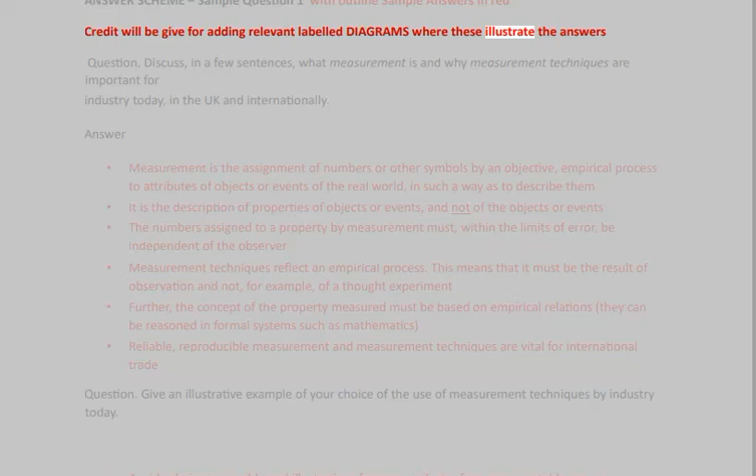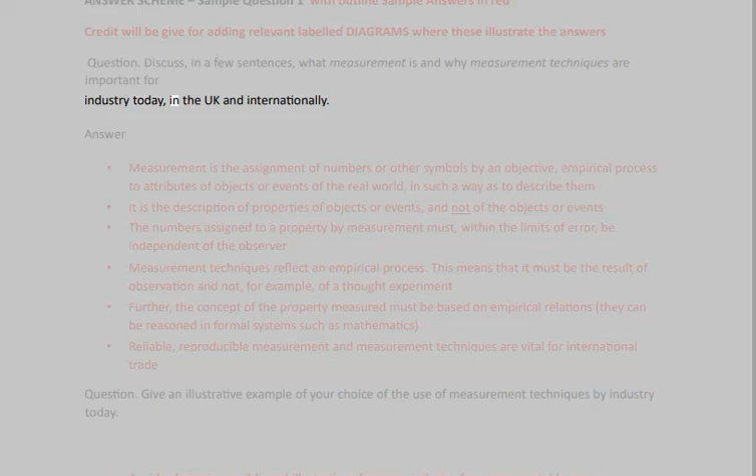Answer scheme, sample question 1 with outline sample answers in red. Credit will be given for adding relevant labeled diagrams where these illustrate the answers. Question: Discuss, in a few sentences, what measurement is and why measurement techniques are important for industry today, in the UK and internationally. Answer.

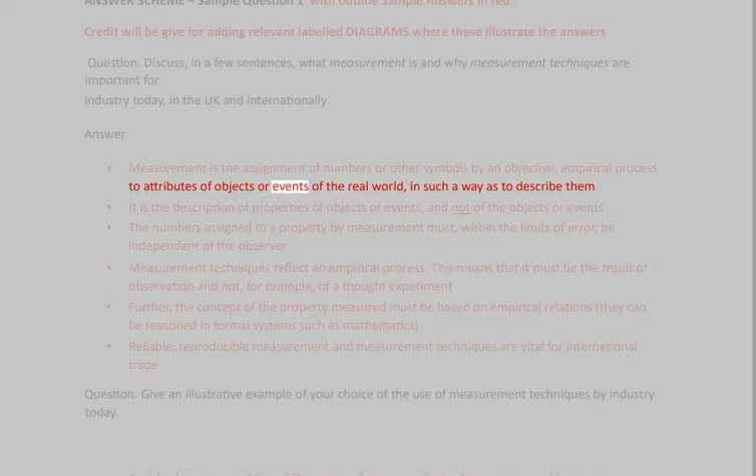Measurement is the assignment of numbers or other symbols by an objective, empirical process to attributes of objects or events of the real world, in such a way as to describe them. It is the description of properties of objects or events, and not of the objects or events. The numbers assigned to a property by measurement must, within the limits of error, be independent of the observer.

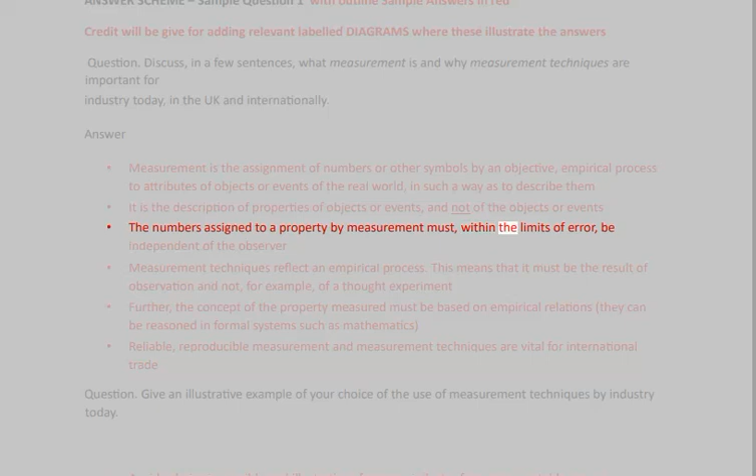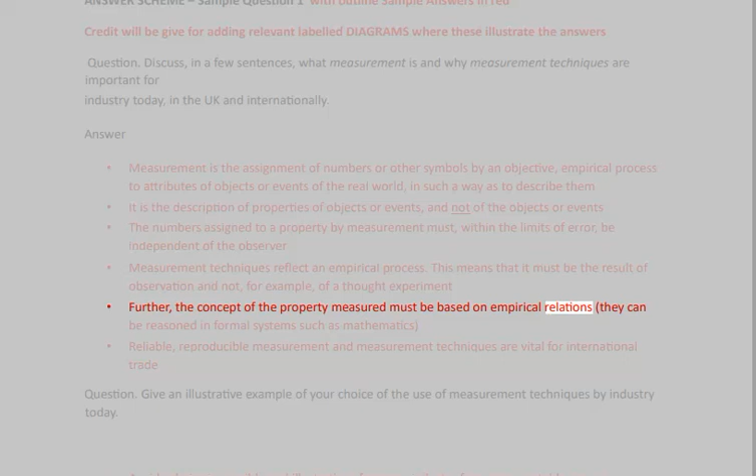Measurement techniques reflect an empirical process. This means that it must be the result of observation and not, for example, of a thought experiment. Further, the concept of the property measured must be based on empirical relations. They can be reasoned in formal systems such as mathematics. Reliable, reproducible measurement and measurement techniques are vital for international trade.

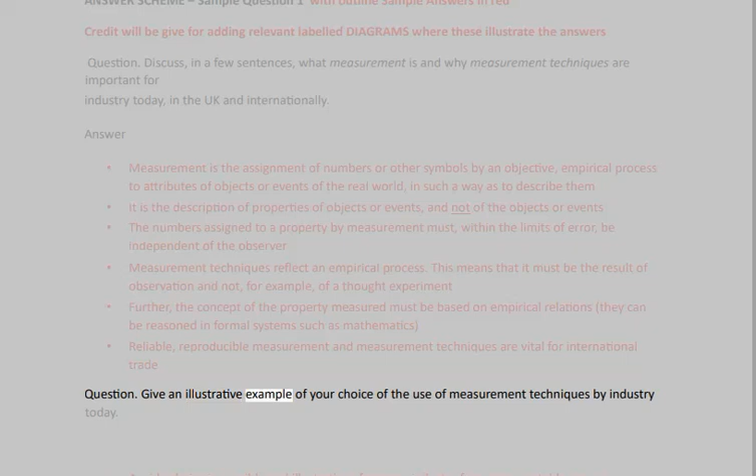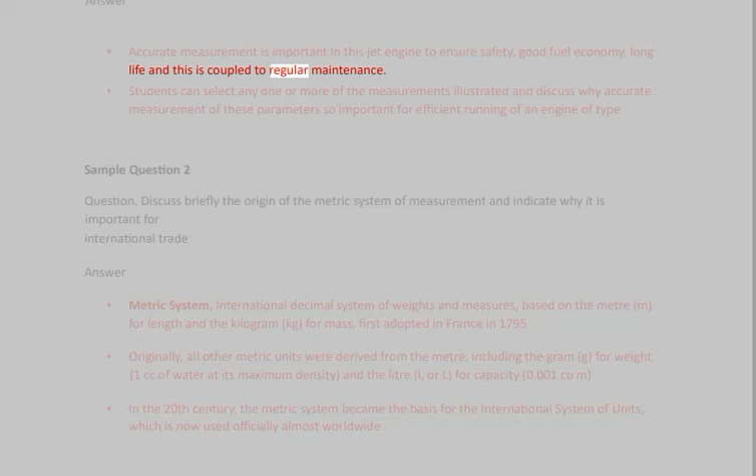Accurate measurement is important in this jet engine to ensure safety, good fuel economy, long life, and this is coupled to regular maintenance. Students can select any one or more of the measurements illustrated and discuss why accurate measurement of these parameters is so important for efficient running of an engine of this type. Sample question 2.

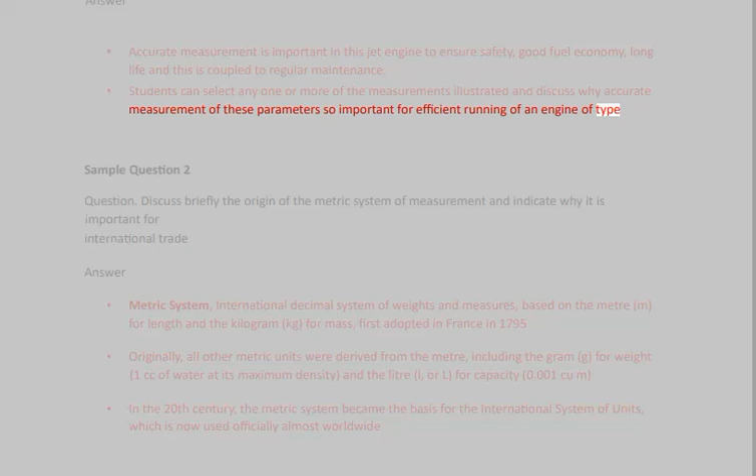Question: Discuss briefly the origin of the metric system of measurement and indicate why it is important for international trade. Answer. Metric system: international decimal system of weights and measures, based on the meter, m, for length and the kilogram, kg, for mass, first adopted in France in 1795.

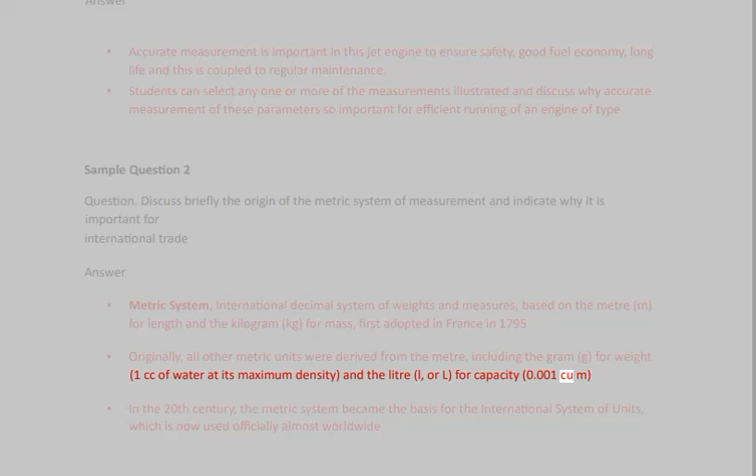Originally, all other metric units were derived from the meter, including the gram, g, for weight, 1 cubic centimeter of water at its maximum density, and the liter, L, for capacity, 0.001 cubic meter. In the 20th century, the metric system became the basis for the international system of units, which is now used officially almost worldwide.

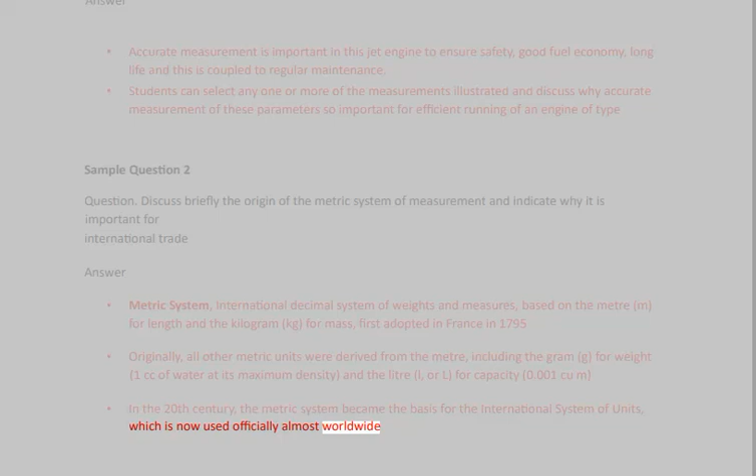Question: Discuss, in a number of bullet points, why high-quality measurement is vital for good data analysis. Answer. If we could not measure, we could not observe the world around us. Observing the world helps us to, at least in part, control our environment. Without measurement, we cannot create the control systems we need. We require good measurement for our control systems.

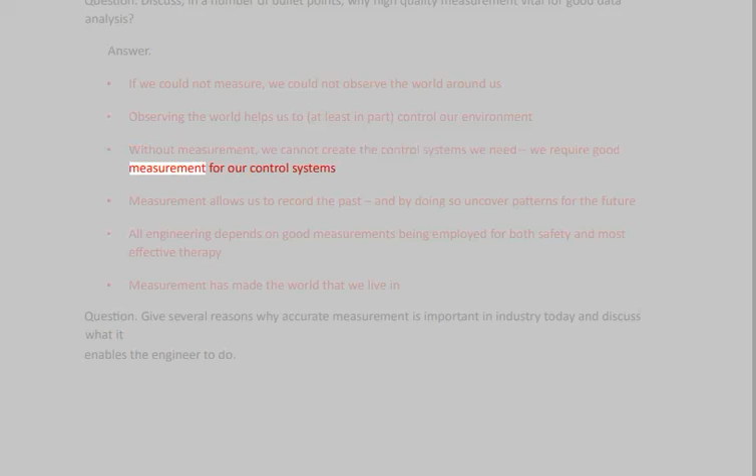Measurement allows us to record the past, and by doing so uncover patterns for the future. All engineering depends on good measurements being employed for both safety and most effective therapy. Measurement has made the world that we live in. Question: Give several reasons why accurate measurement is important in industry today and discuss what it enables the engineer to do. Answer.

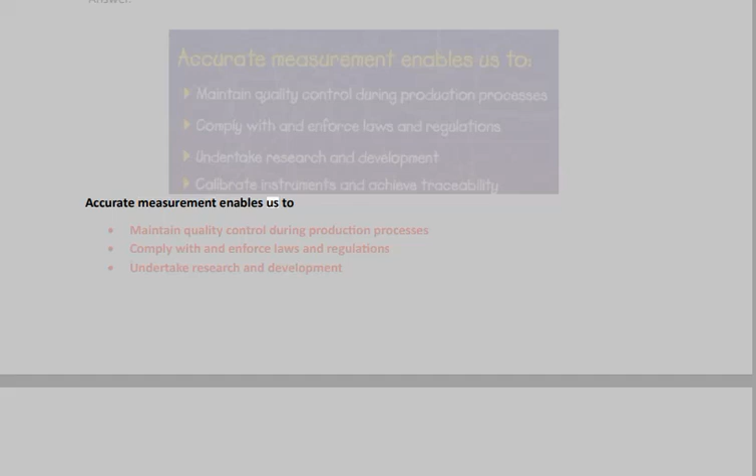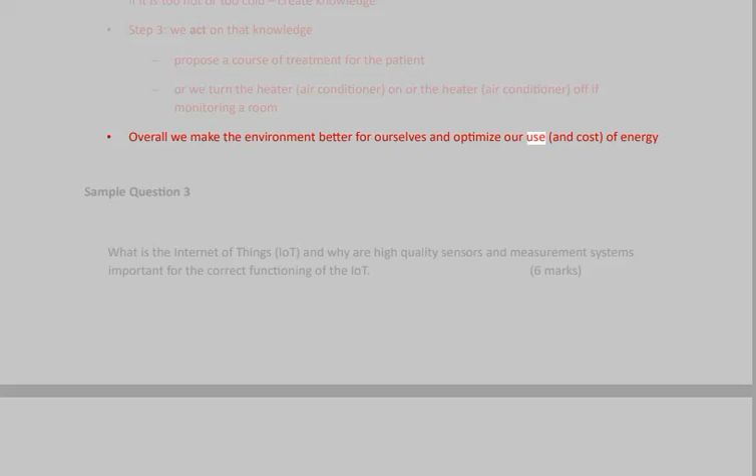Answer. We want to know the temperature of something, e.g. a patient or a room. Step 1: We measure the temperature with a thermometer. Step 2: We use that information to determine if it is too hot or too cold. Create knowledge. Step 3: We act on that knowledge, propose a course of treatment for the patient, or we turn the heater or air conditioner on or off. If monitoring a room overall, we make the environment better for ourselves and optimize our use and cost of energy.

Sample question 3. What is the Internet of Things, IoT, and why are high-quality sensors and measurement systems important for the correct functioning of the IoT? 6 marks. Answer. The Internet of Things, IoT, describes physical objects, or groups of such objects, with sensors, processing ability,

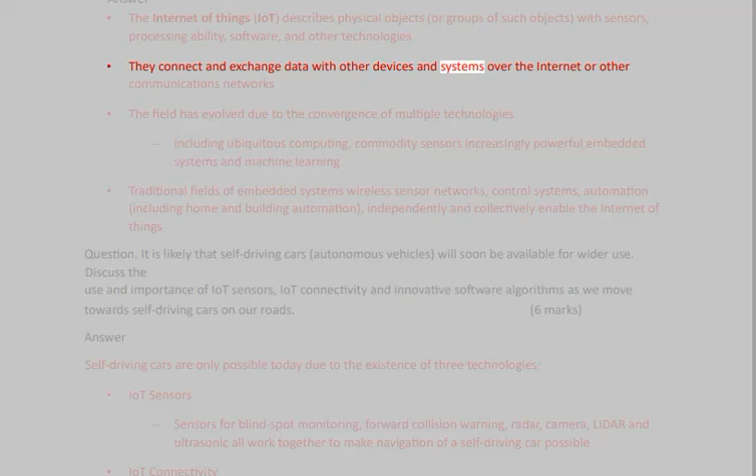software, and other technologies. They connect and exchange data with other devices and systems over the Internet or other communications networks. The field has evolved due to the convergence of multiple technologies, including ubiquitous computing, commodity sensors, increasingly powerful embedded systems, and machine learning.

Traditional fields of embedded systems, wireless sensor networks, control systems, automation, including home and building automation, independently and collectively enable the Internet of Things.

Question. It is likely that self-driving cars, autonomous vehicles, will soon be available for wider use. Discuss the use and importance of IoT sensors, IoT connectivity, and innovative software algorithms as we move towards self-driving cars on our roads. 6 marks. Answer. Self-driving cars are only possible today due to the existence of 3 technologies. IoT sensors.

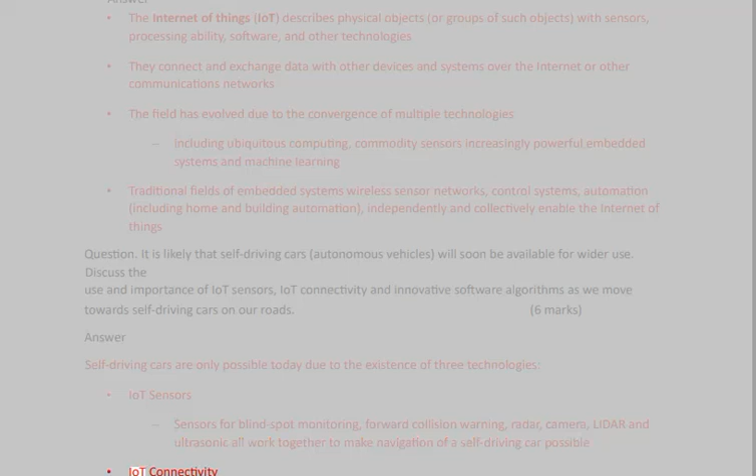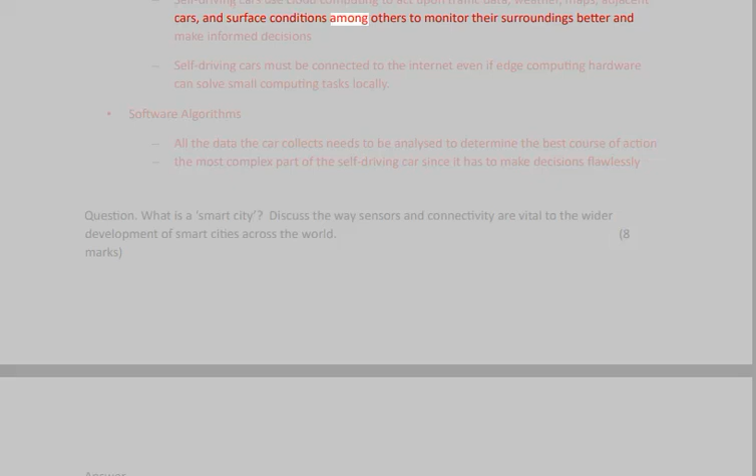Sensors for blind spot monitoring, forward collision warning, radar, camera, LiDAR, and ultrasonic all work together to make navigation of a self-driving car possible. IoT connectivity. Self-driving cars use cloud computing to act upon traffic data, weather, maps, adjacent cars, and surface conditions, among others, to monitor their surroundings better and make informed decisions.

Self-driving cars must be connected to the Internet even if edge computing hardware can solve small computing tasks locally. Software algorithms. All the data the car collects needs to be analyzed to determine the best course of action, the most complex part of the self-driving car since it has to make decisions flawlessly.

Question. What is a smart city? Discuss the way sensors and connectivity are vital to the wider development of smart cities across the world. 8 marks. Answer. A smart city is a technologically modern urban area that uses different types of electronic methods and sensors to collect specific data. Information gained from that data is used to manage assets, resources, and services efficiently. In return, those data are used to improve operations across the city. Many different, yet interlinked characteristics all depend on excellent, dependable sensor systems.

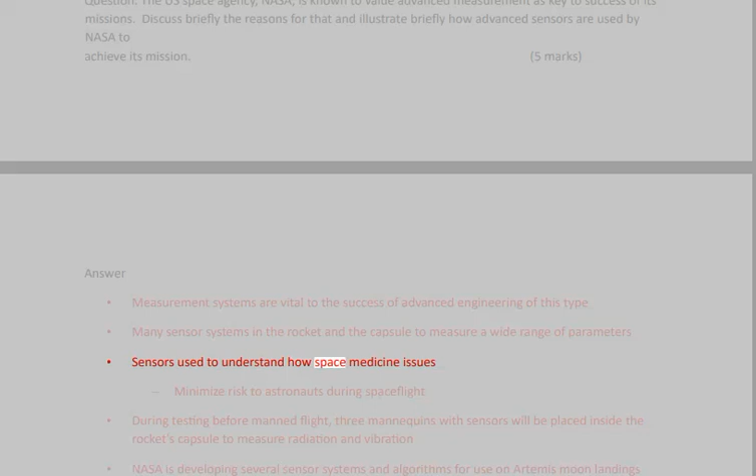Question. The U.S. Space Agency, NASA, is known to value advanced measurement as key to success of its missions. Discuss briefly the reasons for that and illustrate briefly how advanced sensors are used by NASA to achieve its mission. 5 marks. Answer. Measurement systems are vital to the success of advanced engineering of this type. Many sensor systems in the rocket and the capsule measure a wide range of parameters. Sensors are used to understand space medicine issues and minimize risk to astronauts during spaceflight.

During testing before manned flight, 3 mannequins with sensors will be placed inside the rocket's capsule to measure radiation and vibration. NASA is developing several sensor systems and algorithms for use on the Artemis moon landing. Safe and Precise Landing Integrated Capabilities Evolution, SPLICE, technology suite. 3 primary elements: an inertial measurement unit, IMU, and a camera for terrain relative navigation, Doppler LiDAR to determine the lander's velocity and altitude, and hazard detection LiDAR to scan the surface to create a 3D map of the landing field. This can be seen as the spacecraft equivalent to an autonomous automobile.

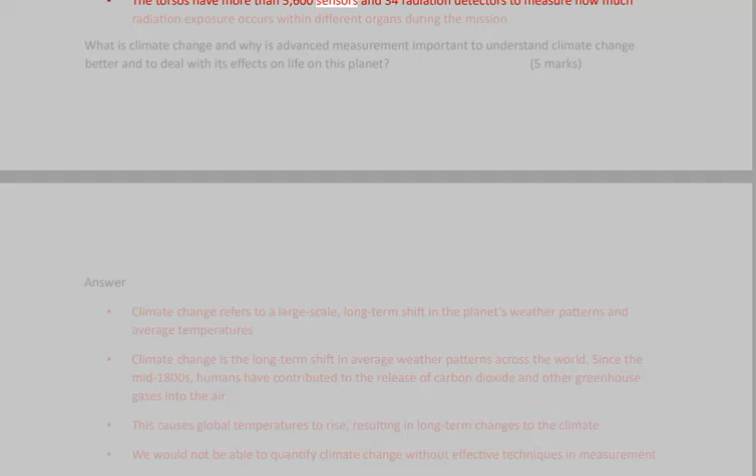Both phantoms are made of materials that mimic the soft tissue, organs, and bones of a woman. Their epoxy resin forms even resemble human lung and brain tissue. To test how radiation passes through the human body, the torsos have more than 5,600 sensors and 34 radiation detectors to measure how much radiation exposure occurs within different organs during the mission.

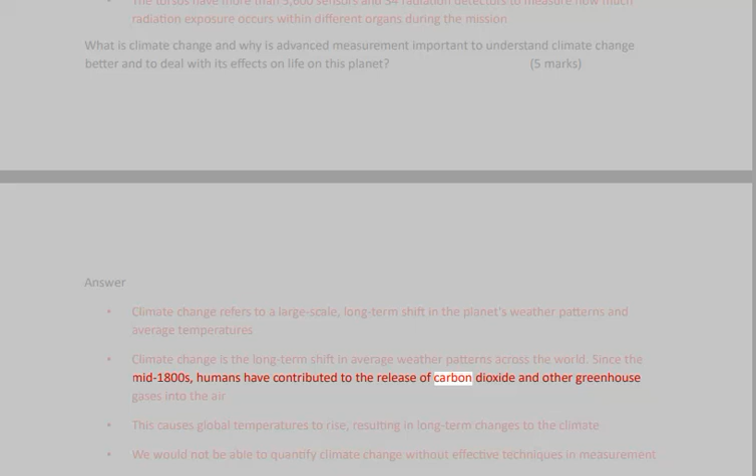What is climate change and why is advanced measurement important to understand climate change better and to deal with its effects on life on this planet? 5 marks. Answer. Climate change refers to a large-scale, long-term shift in the planet's weather patterns and average temperatures. Since the mid-1800s, humans have contributed to the release of carbon dioxide and other greenhouse gases into the air. This causes global temperatures to rise, resulting in long-term changes to the climate. We would not be able to quantify climate change without effective techniques in measurement,